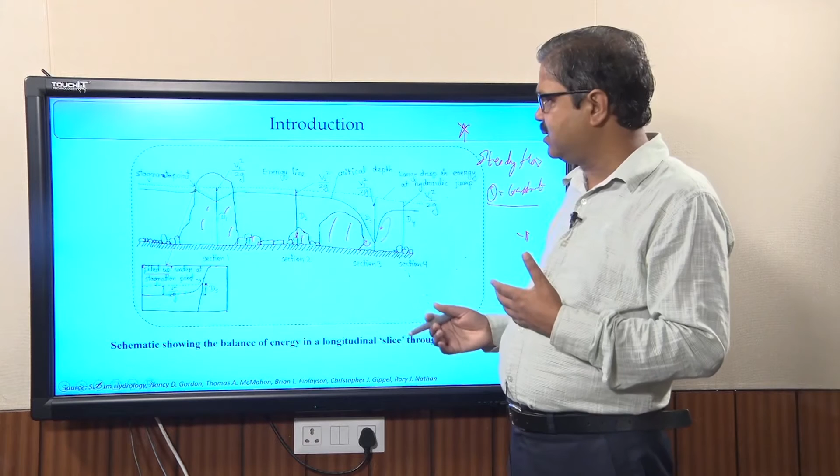So if that is the condition, if I try to draw the hypothetical typical behavior of what could be the velocity variations, what could be the water depth variations - it could look like this. Because of the presence of these big boulders you can have a stagnation point, the point where the velocity is equal to 0. You can have a drop of the velocity head, V1 squared by 2G.

So that is the velocity head, and I am plotting this water depth - this is the bed, plus V squared by 2G is the velocity head, equal to the energy head. So that's the hydraulic gradient line and energy gradient line. If you look at it, there are the hydraulic gradient line and the energy gradient line.

As these boulders pass through, again the V1 velocity flow happens, the stagnation point is here. After that the flow again happens with V1 velocity increasing, and because of the presence of these boulders there are certain energy losses happening.

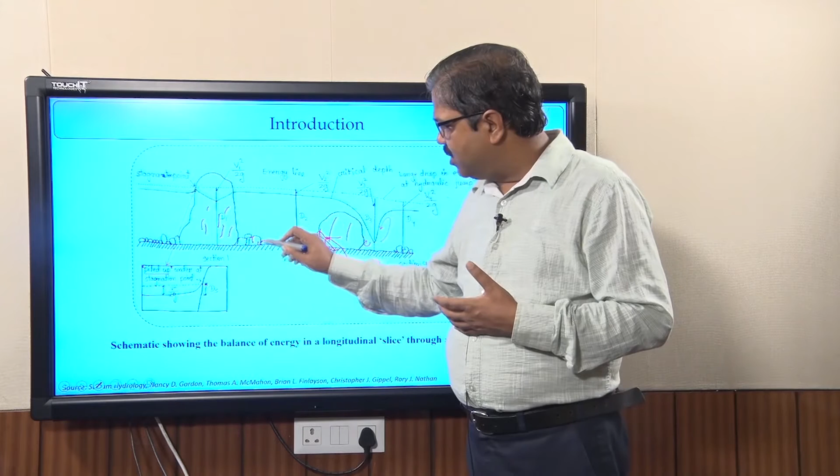That's what is reflected in the gradient of the energy gradient line. The slope of the energy gradient line indicates, because of the presence of these boulders, how much energy loss happens. That's what we can quantify using Manning's equation. So we can have the presence of boulders causing energy dissipation, which is highlighted through the energy lines.

If you look at another set of bigger boulders here, there is formation of hydraulic jumps. As you know, there is a change of flow from supercritical to subcritical. If you look at the energy dissipation that happens because of the presence of these smaller boulders, that energy dissipation is clearly visible from the slope of these energy lines.

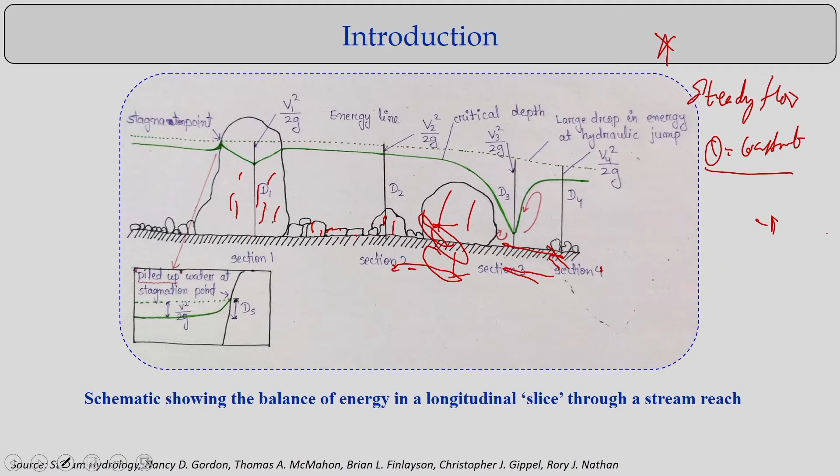The slope of this energy line can always be quantified, showing how much energy is dissipated because of the presence of these boulders. When the flow changes at these locations, it reaches a critical depth and there is a change from supercritical to subcritical flow. Hydraulic jump formations happen, along with vortex formations and energy dissipation, causing a change in energy losses here.

If you look at a typical section like this, there are stagnation point formations, energy dissipations because of bed roughness, and where there are more obstructions like these boulders, there can be a lot of hydraulic jump formations. Because of these hydraulic jump formations, you can have a large drop in energy. That's what happens in open channel flow, and it also happens in rivers.

If you look at typical river cross sections, you can see energy losses happening. Now the point is, how do we quantify it, how do we know where the hydraulic jumps are going to happen, and what type of energy dissipations are going to occur.

Those things we can analyze under conditions of steady flow. That means we assume the flow is steady, and this assumption is quite valid when you look at high flow conditions or design flow conditions - what could be the extreme conditions in terms of energy dissipation, velocity variation, and flow depth variation. That's what we try to know from that. That's the reason many steady flow analyses are also enough for us to solve these problems.

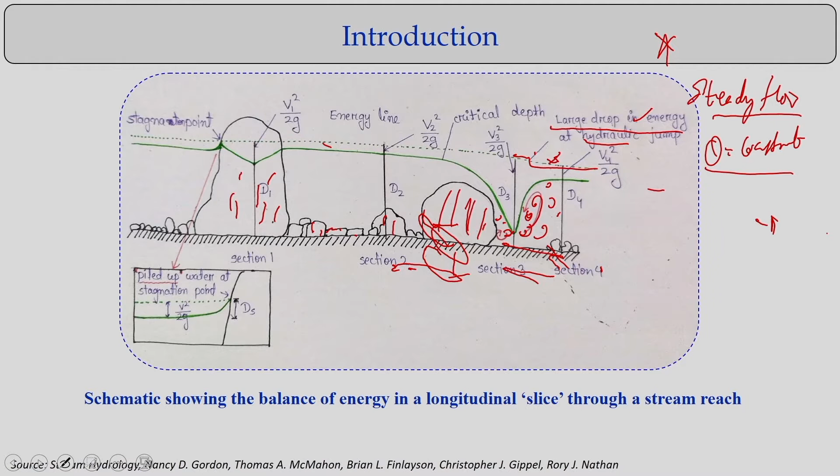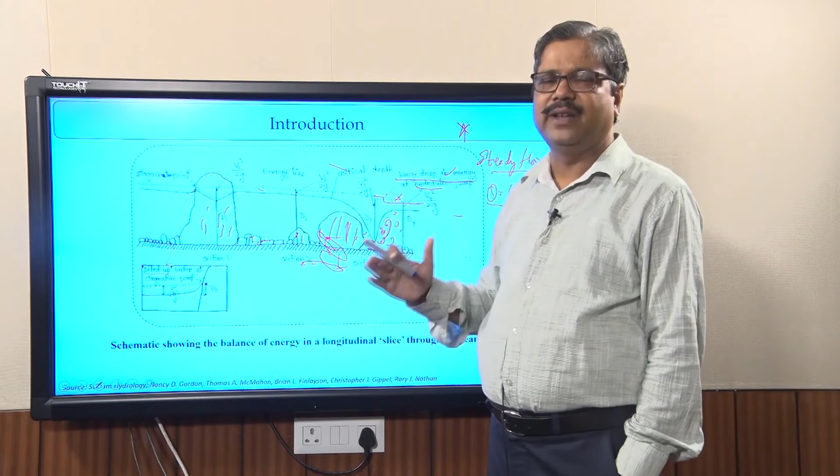These figures clearly show how the hydrodynamics vary in a channel or river with different sized boulders. There could be hydraulic jump formation, stagnation points, and energy losses because of bed roughness. You can understand all this if you sketch this figure, showing how the hydraulic gradient line and energy gradient line vary, and how we can use the concept of specific energy and specific force for this.

Let's go to the next slide.

In the next slide, as we discussed, there are two basic principles: mass conservation and the linear momentum equation. Beyond these two equations, we also have the energy equation. We can apply this energy conservation equation in a control volume - if you consider a control volume, you can apply the energy equation.

As you know, there are three types of energy: potential energy, kinetic energy, and the energy due to pressure difference, which is pressure energy per unit weight. That's the reason, if you know basic fluid mechanics, we use Bernoulli's equation.

The same version can be used for open channel flow, where the total energy per unit weight is defined as potential energy, the energy due to pressure per unit weight, and the kinetic energy per unit weight. This is the sum of the three energies, as you know, it's part of Bernoulli's equation. The same total energy available at that particular cross section can be divided into these three energy components.

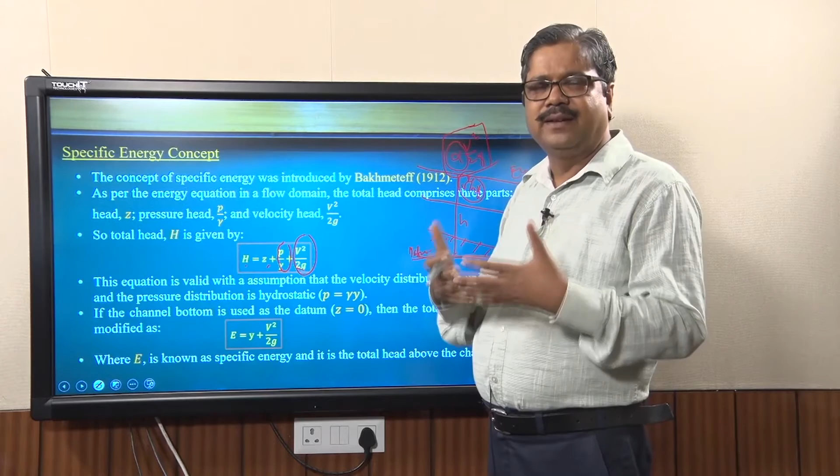This is a very simple concept from fluid mechanics. The idea we have brought is total energy, or total energy per unit weight, called total head. That has three compositions: potential energy, the flow energy or energy due to pressure per unit mass weight, and the kinetic energy per unit weight. We can easily get these for a particular smaller control volume as a reach, and compute these three energy components which represent our total energy. Connecting the total energy points is called the energy gradient line, so we look at how the energy variability is going.

So what do we do? We make it a bit simpler for us with certain assumptions. The first simple assumption is that if I consider the surface as a horizontal surface, and the flow is coming over this horizontal surface as my datum, then Z is equal to 0. If I consider the river bed as the datum, then Z becomes 0. So I have only these two components left. The energy components will have two components.

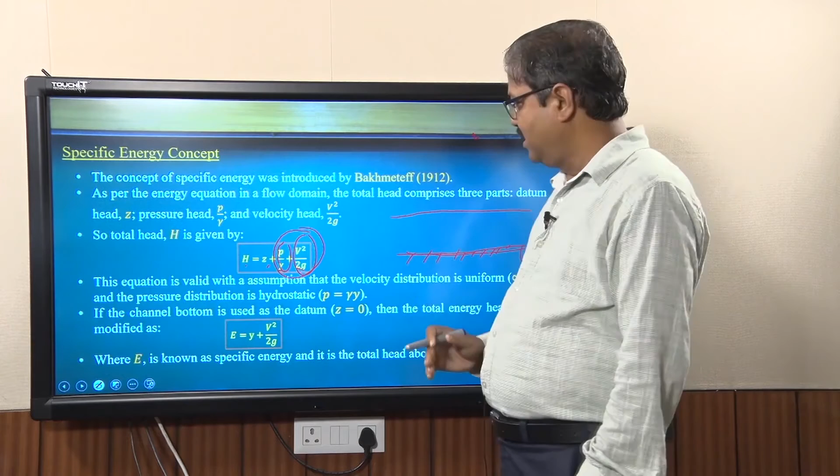Now there is the flow energy due to pressure difference, and there is the kinetic energy because the flow is there. If you have these two energy concepts, and if you consider the pressure distribution as hydrostatic, that means you are considering the pressure distribution as close to flow at rest. So hydrostatic pressure distribution only varies with depth. The pressure distribution is a linear triangle, and as you increase the depth, the pressure intensity increases. It is a linear function, as discussed in fluid mechanics.

So if you have a hydrostatic pressure distribution, and if I assume the channel bottom as the datum, this energy equation is very simplified into this form. Now the energy, what I am looking at, is we are just getting the energy per unit weight for a channel where the pressure distribution is hydrostatic and the channel bottom is considered as the datum. Then that energy we call specific energy. It is a simplified version with these assumptions.

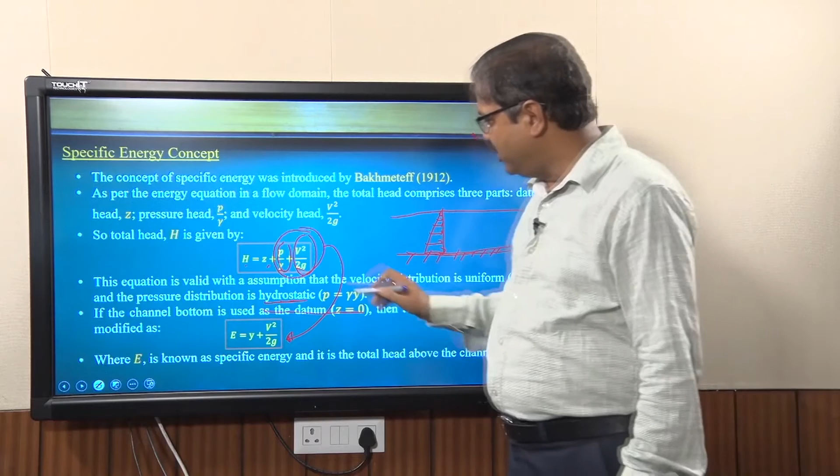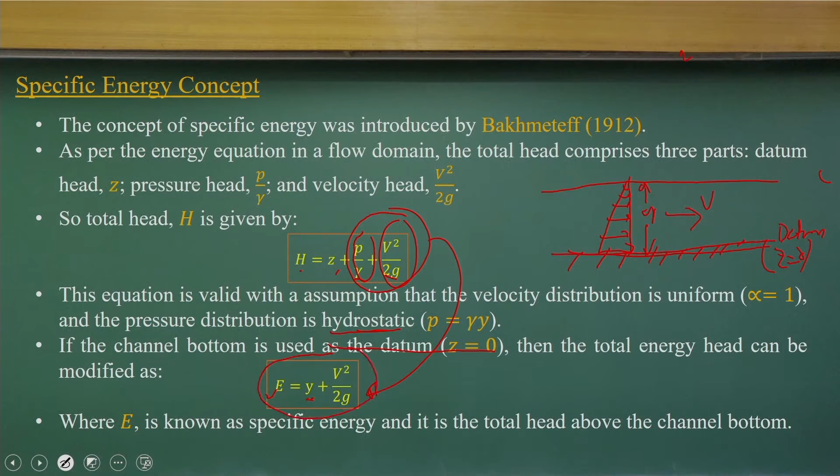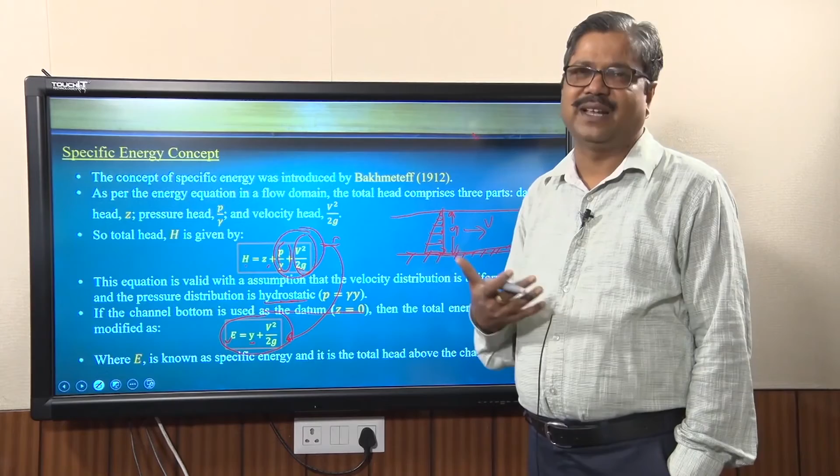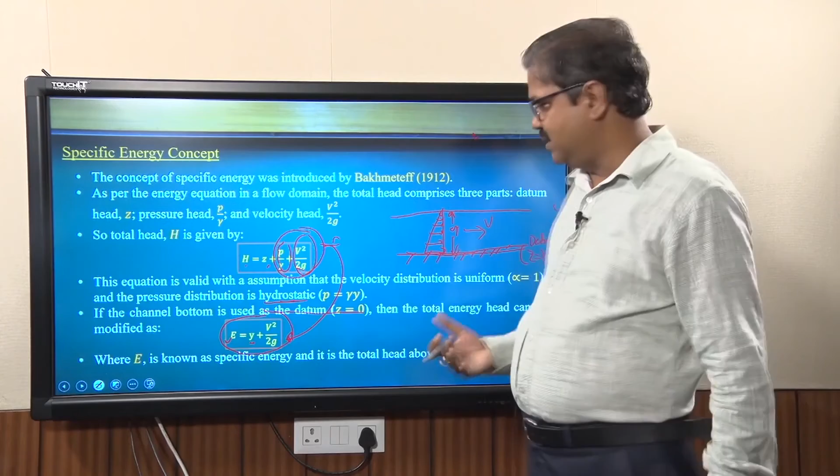So we have the specific energy E as a function of flow depth y, plus v squared by 2g, where v is the velocity. If you look at it, it is a very simple function for our energy calculation. Many times we use this specific energy instead of the full equation, because these two assumptions can be validated for many cases. This assumption can be considered for many analyses to understand how energy dissipation is happening. That is the reason we compute specific energy. To be clear: specific energy is the total energy per unit weight where the channel bottom is considered the datum and the pressure distribution is hydrostatic. It is not the total energy in an open channel flow or river flow.

Considering that, if you look at these equations, it is a very simple way. Many times we can consider the river as a rectangular channel. If I consider the river as a simple rectangular channel, having a width b and y as the depth of flow, these are assumptions, but they are also quite valid.

Under these conditions, we can simplify the equations further. If we have a discharge Q passing through steadily, I can compute the smaller q, which is the discharge per unit width, that is q by b. If I put that in, then y is the variable, so I can easily write velocity as q by y, since discharge equals velocity into area. Here, discharge per unit width divided by the depth gives the velocity. Substituting that in, I get this equation, writing the specific energy equation in terms of discharge per unit width. So in this equation, if you look at it, I have three variables, E, y and q.

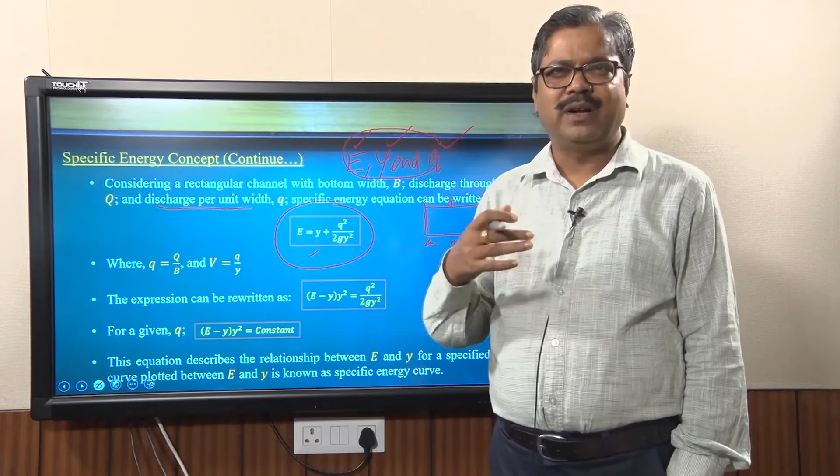Okay, so I have specific energy, the flow depth, and the discharge per unit width. So 3 variables I have, established with these 3 equations. Now I am not going to detail minutely look at these equations and the derivations which we can follow from Hanif Chaudhry's books, but let me give a conceptual understanding that we have the specific energy y and the q, 3 variables, and a relationship of specific energy we got.

If we got this relationship, now we are looking at, if I make E a constant, we try to know what could be the relationship between the y and q. Again, let me repeat it.

If I consider E is a constant, that means I am considering a reach of the river where energy dissipation is not happening that much. So energy remains constant at that reach of the river. If that is the condition, what is the relationship between the y and small q? We can establish it using these equations.

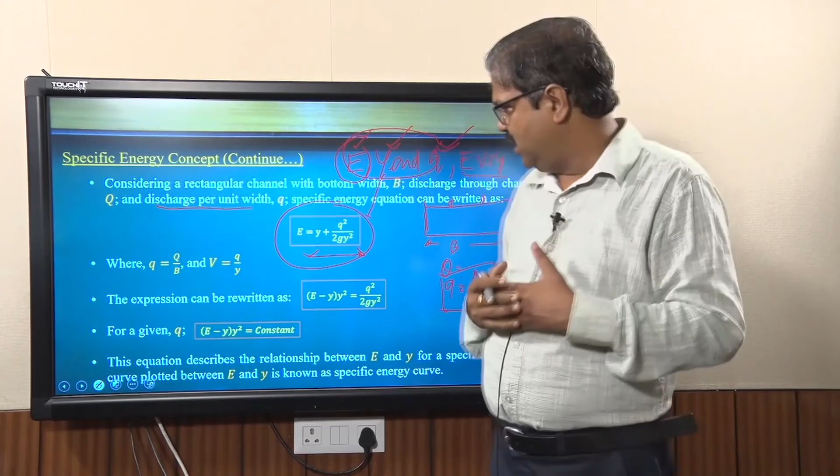So if you look at the first point, we assumed q is constant—there is a small mistake here. If you consider q constant, the equations become like this, a simple way. So we can rewrite these equations when q is constant, and you get a cubic equation form.

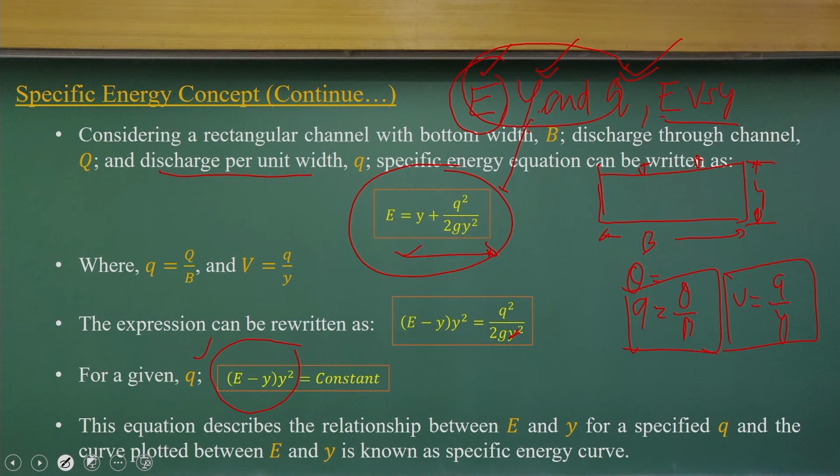So we get cubic equations, and we can get the solutions for y. That means if q is constant, we can get solutions of y for E, or we can develop the solution curve for these cubic equations, which mathematically show the behavior of the curves. That is what is called the specific energy curve, which we discuss more in open channel flow. That is what gives the establishing relationship.

Now, if you try to understand it, q is constant, so discharge per unit width does not vary significantly. If you consider that, then there is a relationship between E and Y, that is what we have got. It is cubic, and nowadays you can solve these equations easily, it's not a big issue, but let us see the behavior of these solutions—if I plot E versus Y, where E is the specific energy and Y is the depth.

That is what is called the specific energy curve. The equation of E-y will follow this curve. So following this curve, the third solution will be a negative value which will come here. So there are three solutions: y1, y2, and y3. For this q equal to constant, one will be negative, which we should not consider.

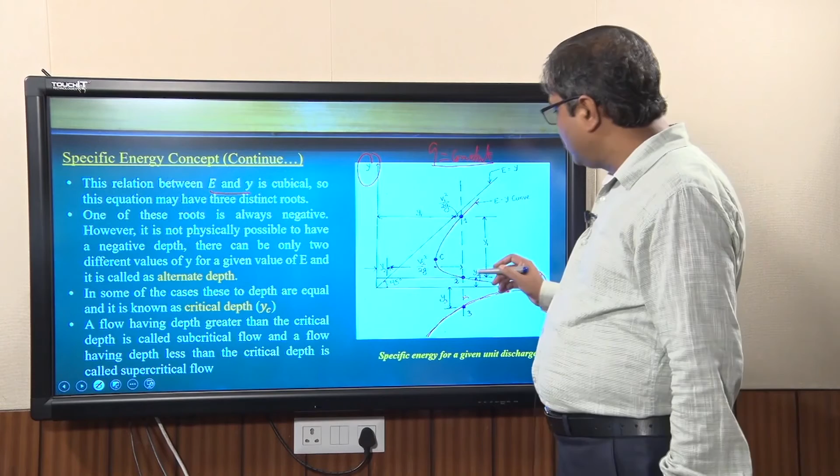It is not physically possible to have a river flow depth that is negative, so we cannot consider that part. So there are two depths, y1 and y2, which are called alternate depths.

That means what? We try to understand it from the specific energy curve. For a constant q, the specific energy variation with respect to y looks like this. If you look at this specific energy curve, very interestingly, there will be a point where E equals minimum. Beyond that, the flow is not possible.

That means for a particular q value, we will have E minimum, the minimum specific energy, and beyond that flow is not possible. That minimum specific energy, if flow is happening at it, the corresponding depth is called critical depth. That means at that particular discharge per unit width, the critical depth occurs at the point where specific energy is minimum. That is critical.

Beyond that, the flow is not possible for this q value beyond the E minimum value. So we cannot have that. The flow can only go up to the E minimum value. This is what we call the critical flow.

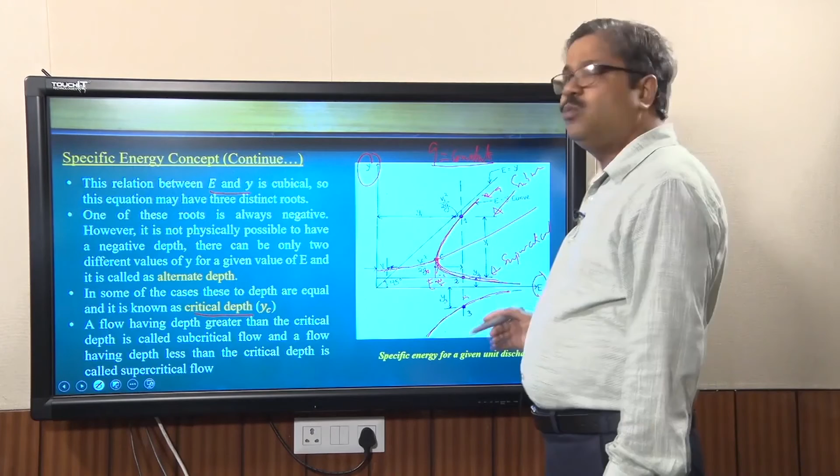No doubt you know that we can compute the flow Froude number in fluid mechanics or open channel flow to know whether the flow is subcritical or supercritical, based on the flow Froude number. As the Froude number is lesser than 1, that will be subcritical flow, and Froude number greater than 1 will give supercritical flow. That, by definition, you already know.

Let us understand physically what actually happens. In subcritical flow, the flow depth is more and the velocity head is less. In supercritical flow, the flow depth or pressure energy is less, but the kinetic energy is more. Just try to understand this. I know you all know about the Froude number and by definition what subcritical and supercritical mean, but try to understand that when flow is happening, it has two energies, as we discussed earlier, since specific energy represents two energies.

One is the pressure energy per unit weight, and the other is the kinetic energy per unit weight. So if you look at these two energies in subcritical and supercritical flow, what is the difference? The difference is that in the case of subcritical flow, the pressure energy is quite significant as compared to the kinetic energy.

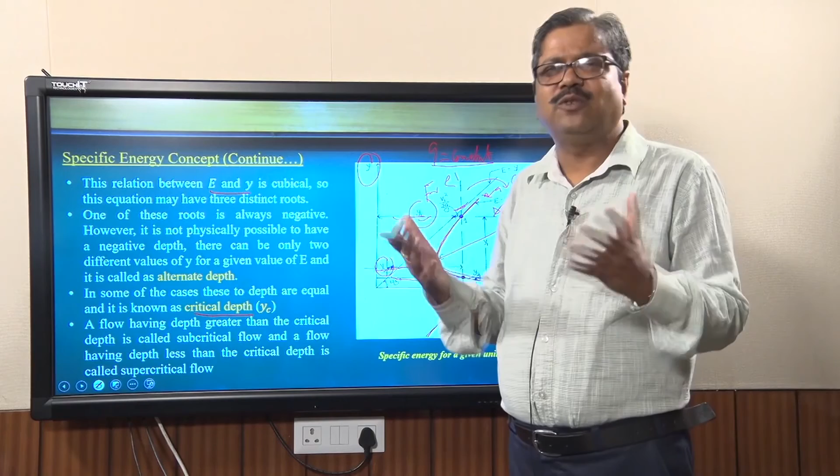So whenever you get a problem, try to understand what energy components we are using, and how these energies vary with respect to the flow depth in the specific energy curve. Very interestingly, it indicates there is a minimum point where the minimum specific energy occurs. Beyond that, flow is not possible.

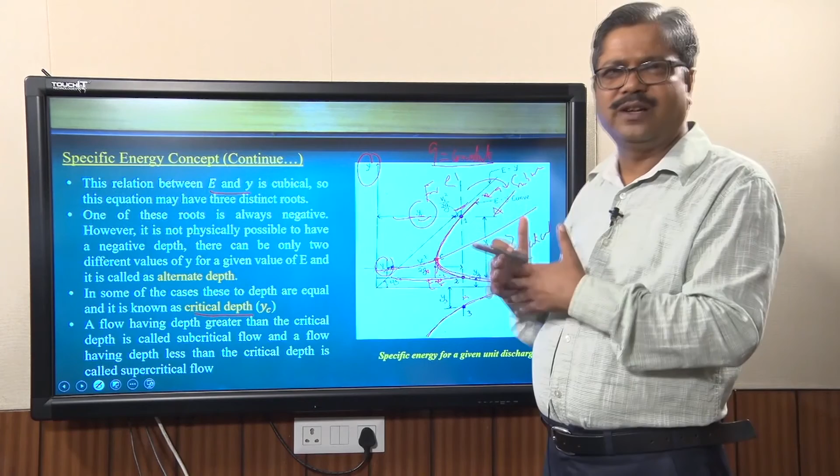That point is called the critical flow, and the flow depth there represents the critical depth. Beyond that we have two divisions: subcritical and supercritical regions. In terms of Froude number, flow Froude number greater than 1 is supercritical, lesser than 1 is subcritical, and flow Froude number equal to 1 at the point of critical depth. That is the concept we should understand.

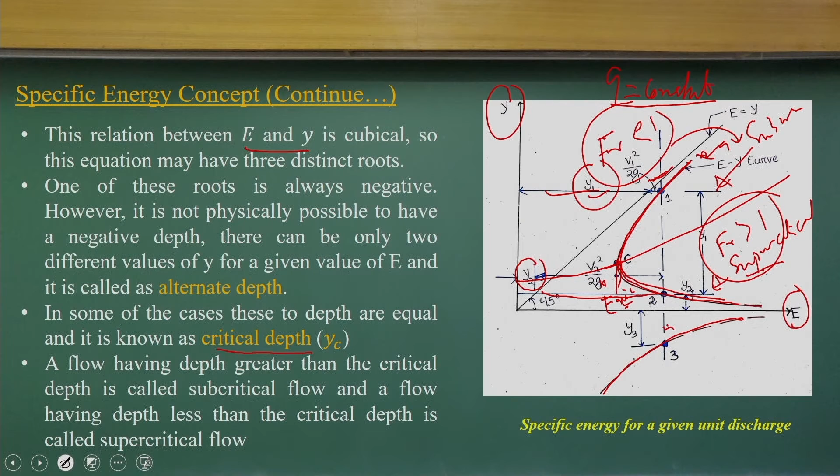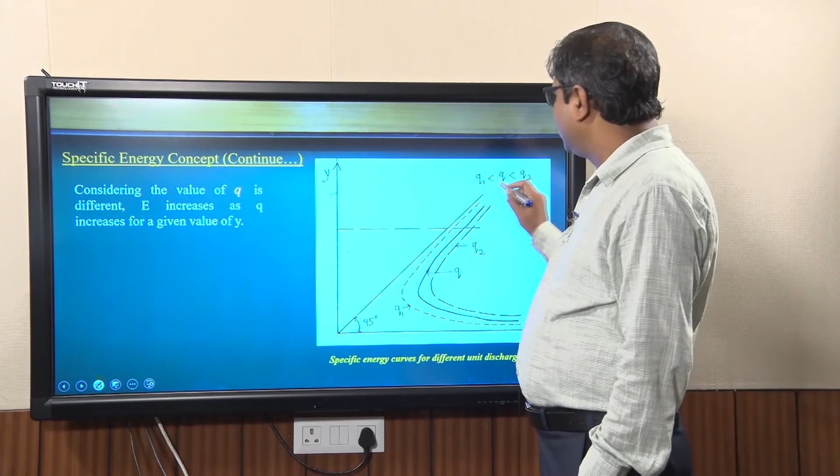Let us understand the specific energy concept from a river point of view. Consider the river width variations happening, with the same discharge Q coming through with variations. As the width increases, Q decreases, so the discharge per unit width decreases. If the discharge is varying from Q1 to Q2, then Q2 is higher than Q, and Q is higher than Q1 - that is the order of increasing discharge.

If you draw the specific energy curve using the same equations for different Q values, Q2 will follow one curve, Q will follow another curve, and Q1 will follow yet another curve. This shows the relationship in E and Y space, where we can find the solutions for these values - the possibility of flow at different E and Y for these constant Q values. That is what we have drawn for Q2, Q and Q1.

Now let me analyze this curve. A very interesting fact is shown here. As I said, these points are reaching the critical flow point, where we have minimum specific energy. That point is shifting. This means as Q increases, we need a higher minimum specific energy to maintain that flow. But if Q is lesser, the minimum specific energy is lesser compared to these other cases.

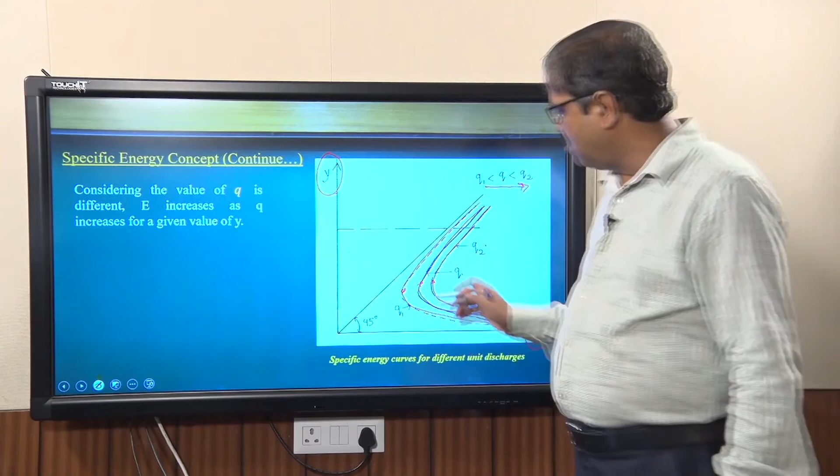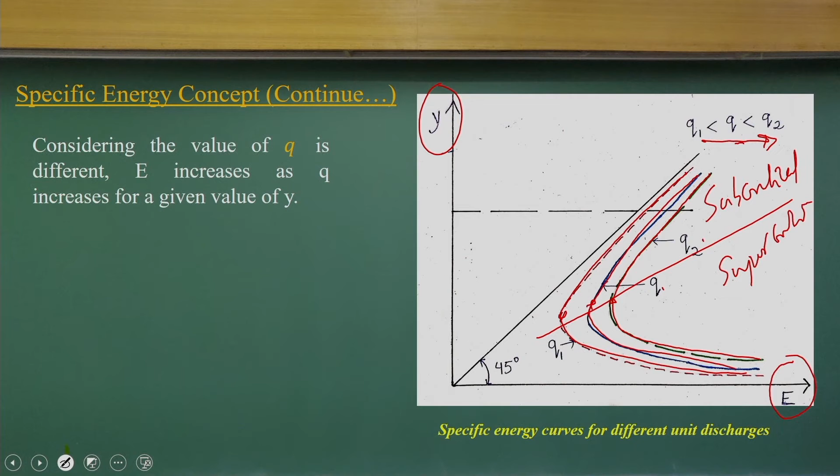So we can understand that as river width increases or decreases, this minimum energy concept changes, and the critical flow depth also changes accordingly. This is a simple way of trying out the energy partitioning between E and Y with different values of Q, and how the regions of subcritical and supercritical flow appear with different Q values. We can plot and analyze how the flow can happen with variations of Q as shown in these graphs.

Now consider that the river has a bed slope - it is not flat. If the river has a theta angle of slope, that represents real conditions. The river can have a very gentle or mild slope, like the Brahmaputra river in Assam valley, about 1 in 10,000 or 1 in 8,000 - a very gentle slope. But in the Himalayas, the slope could be of the order 1 in 20. So there is slope variability, decreasing from hilly areas to floodplain areas. Considering this, there is a slope in the channel, and we apply the same specific energy concept for Q.

Now we are writing in terms of Q, so V equals Q by A, and we also consider alpha, the kinetic energy correction factor. We use the concept of velocity distributions, which as discussed will be logarithmic velocity distributions in open channel flow. From that we can compute the kinetic energy correction factor, the kinetic energy per unit weight - that's why we introduce the alpha value here. But with a slope present, we express the flow depth and vertical distance in terms of d cos theta, and in terms of y we get y cos squared theta into this part.

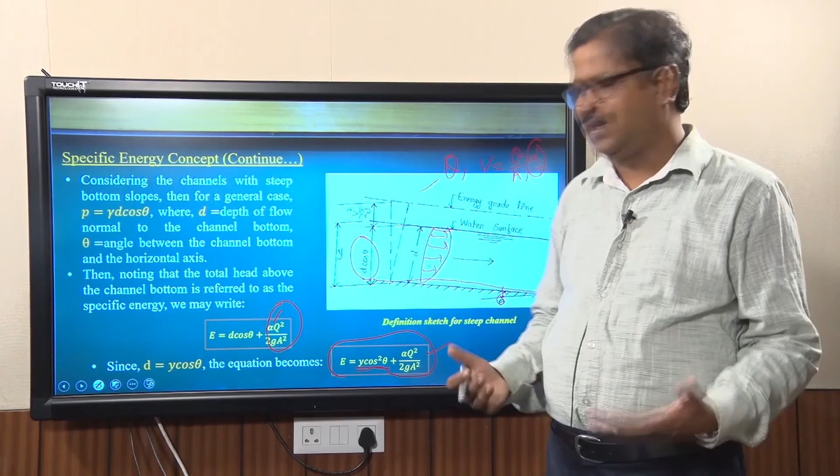This is a very simple way. We have used an inclined channel or inclined river having an angle theta, assuming the slope of the river does not change significantly. As it is having angle theta, what could be the specific energy equation if I consider the velocity variations in terms of alpha and Q by A, where Q is the discharge and area is the flow area? We can write the specific energy in a more detailed form for a river condition where it has angle theta, velocity distributions, as well as the y in terms of the normal depth, the projection part. So simple geometry gives us the specific energy: y cos square theta plus alpha Q square by 2g A square. It is the energy equation, specific energy equation for channels having angle theta, also considering velocity distributions in terms of alpha, the kinetic energy correction factor. That is what we write to get this formula.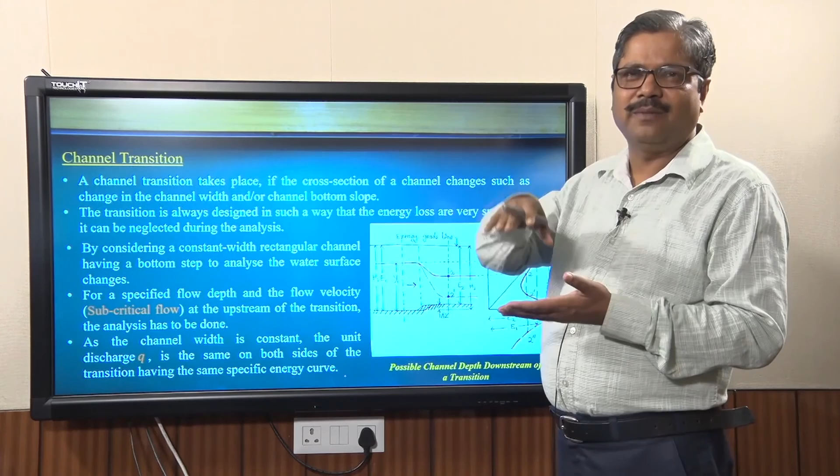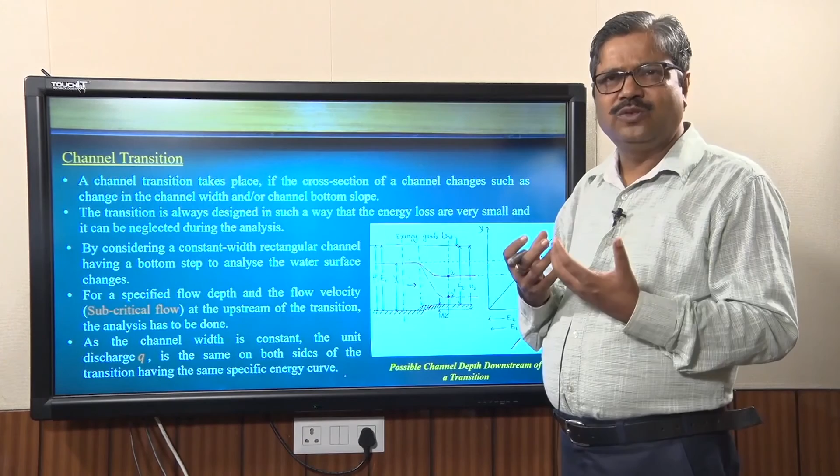Now let us come to a real problem: channel transitions. Many times, as I say, the width of the river can increase and decrease. Same way, in the river we can have a rise and a fall, because of the presence of boulders you can have an increase of bed level, or there could be a natural fall. So there could be a rise and fall, expansion and contraction, the river width can increase and decrease. Because of that, this is what is called channel transitions, meaning the cross section of a channel changes such that the channel width or channel bottom slope changes, and there could be a rise or a fall, and that is what transitions are. Most of the time these energy losses due to friction at these transition locations can be considered negligible; it is not that significant. Also many experiments conducted show it is not significant if you have gradual transitions happening. That is what we can consider.

If that is the consideration, let me try to understand it. There is a rise, okay, this rise, increasing the bed level, maybe you consider the boulder presence, or maybe a small weir construction by the engineers. So if you have that condition, then what will be the flow behavior? That is let us understand it.

So if that is the flow condition, there is a flow coming which has flow depth y1. Specific energy, as we can consider the channel is horizontal, you can find out the specific energy, and the total energy is the same, H1 equal to E1, and you have y as the flow depth and delta Z as the rise depth, okay, the equivalent rise. If I consider it, now the point is coming: if I draw this, what will be the specific energy at section 1 and section 2? If I compare it, and if the channel width is constant and discharge Q is the same for us, that means Q is constant for us, and we are drawing the specific energy curve for that.

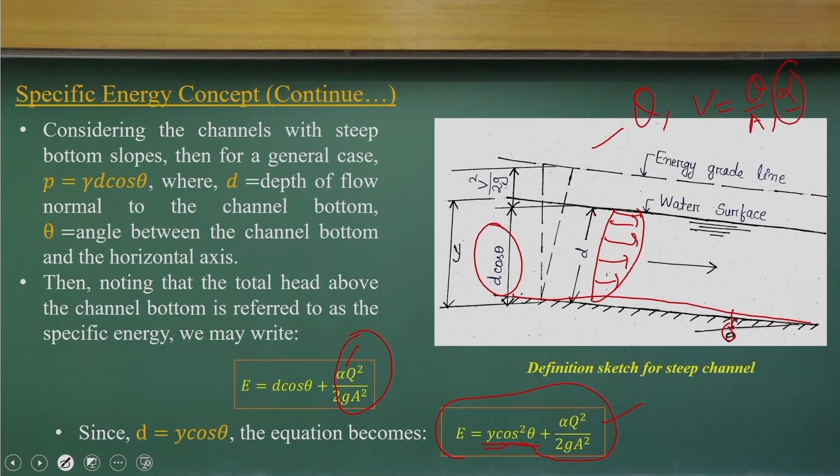Specific energy curve for that, we are considering the specific energy curve. If you look at that, for Q constant, we can draw the specific energy curve. That means if section 1 is here, then what are we actually computing? If you look at very simple things, as we have considered there are no energy losses, the energy gradient line can be like this, so H1 is equal to H2. But the specific energy at this E2, because the energy gradient is flat here, the specific energy at the two locations will be E1 minus delta Z. The delta Z is the rise, the specific energy will drop, that is what will be E2 equal to E1 minus delta Z. Very simple thing, because of increasing the level, the specific energy is going to reduce here as E1 minus delta Z. If that is the condition, that means in the specific energy diagram, one point lies here, and the two solutions will lie either at point 2 here or at point 2 dash here.

Is it correct? E1 is the energy at the upstream point, E2 is the energy at the rise point, and we could have two solutions: one is 2, the other is 2 dash. So we have to try to understand which solution, 2 or 2 dash, applies.

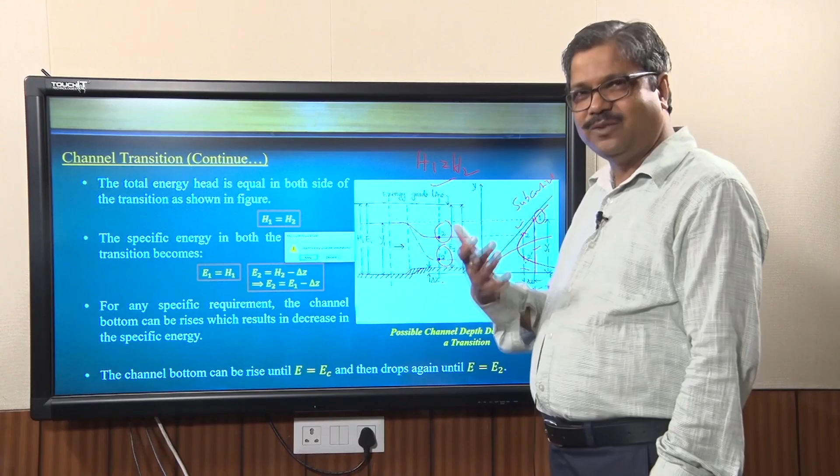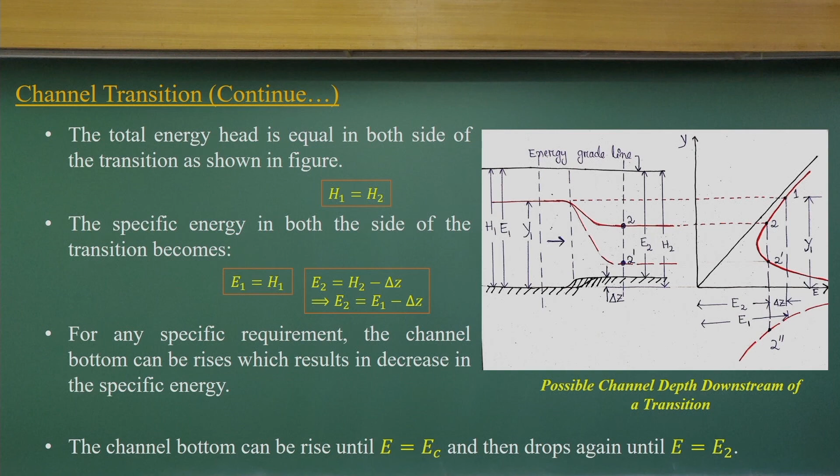So basically, if there is a rise, we can draw the specific energy curve, compute E1 and E2, and find out whether the flow coming from upstream is subcritical or supercritical. Looking at that, this figure is very interesting and informative for us.

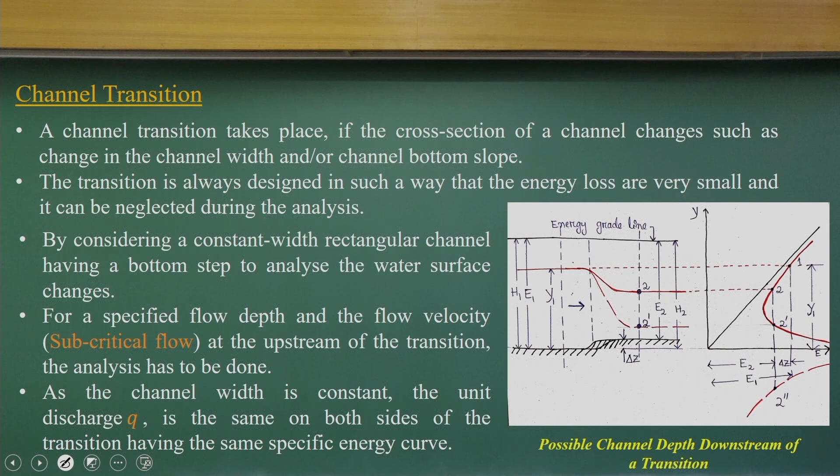If the flow condition is subcritical, the conditions will look like this. When the flow is supercritical at the upstream level, point 1 is here, in that case the solution will be point 2, where the flow depth is going to increase. You can see in this curve that the flow depth increases and the velocity decreases as the rise happens, when the flow is supercritical.

So let me summarize: if there is a step rise in the channel bottom, the flow depth decreases downstream of this step if the flow upstream is subcritical. If the flow upstream is supercritical, the reverse happens and the flow depth increases.

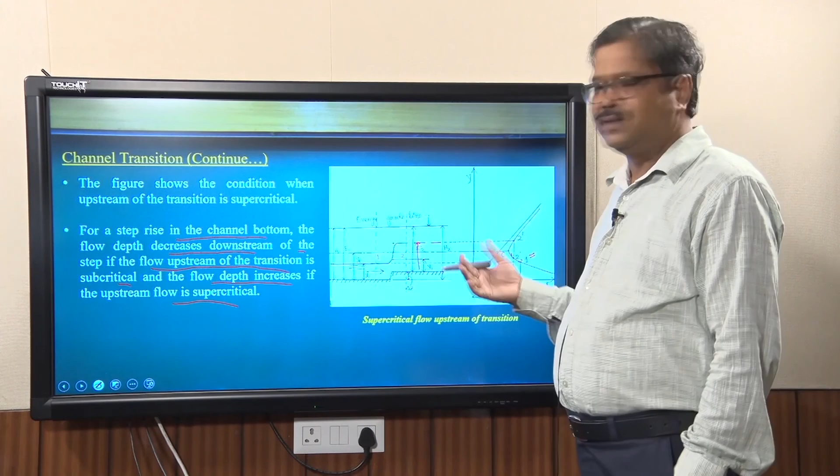The other way around, you can also talk about velocity increase or decrease patterns, as these diagrams show flow depth and velocity. Specific energy consists of flow depth and velocity head. So because the flow changes from subcritical to supercritical, the rise of the bed has a different effect in each case, in terms of flow depth increase or velocity increase. All these interpretations can be done with this specific energy curve analysis.

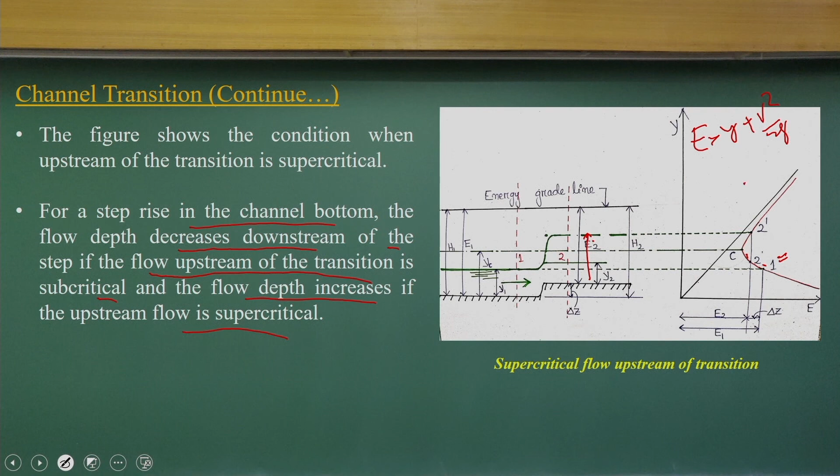Similarly, we can analyze the case if there is a drop instead of a rise. With this, let us conclude this lecture.